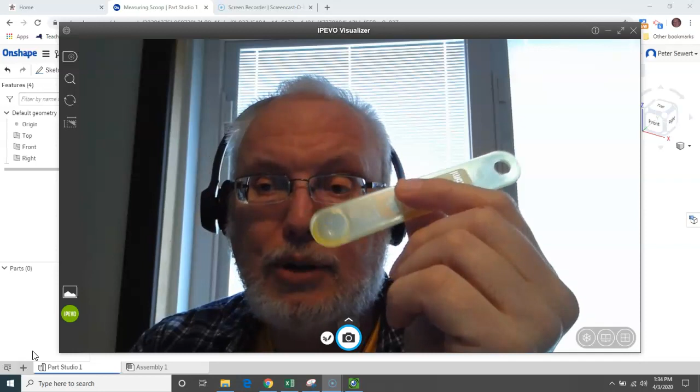I've been looking through drawers in my house trying to find stuff to draw, and I found one of these, a simple measuring spoon. We're going to figure out how to draw this measuring spoon using Onshape. As a matter of fact, I'll show you one I did before. This one is dimensionally a little different than the one we're going to do; I used another one.

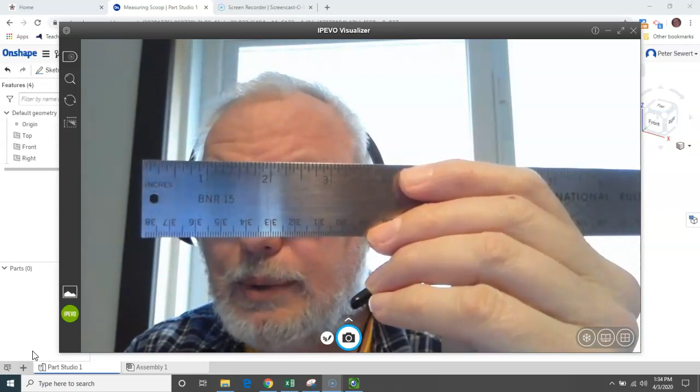This was a while ago, but you're probably thinking, geez Mr. Sewert, I don't have a way to measure stuff. You might have something at home, like a ruler - this is a nice metal one, but an older wooden one is fine too. You might have a tape measure. And if worse comes to worse, I know the distance between these two creases on my finger is about an inch.

So if I look at something, I can say to myself, that's like half an inch - I'm holding this up to my finger right now - that's like half an inch or 3/4 of an inch, something in that neighborhood, just keeping it proportional. I'm not looking for exact or perfect here, just things that are proportional, I guess is the best way to put it.

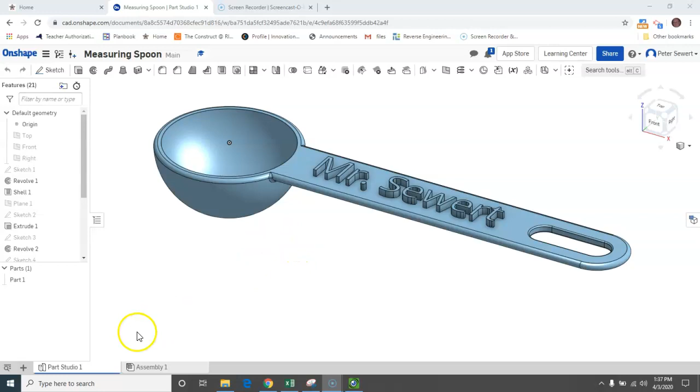When you start Onshape up, you're going to end up with something similar to this - you won't have all these things because I've been working on this - but you'll see Onshape, and then the word create. Click on create, hit document, and put in a document name. I'm going to put in measuring scoop. I'm going to click on that, and it brings up this familiar work planes thing.

That's a little different looking, but familiar in the same vein, I guess is the best way to put it. So we have front, top, and right planes.

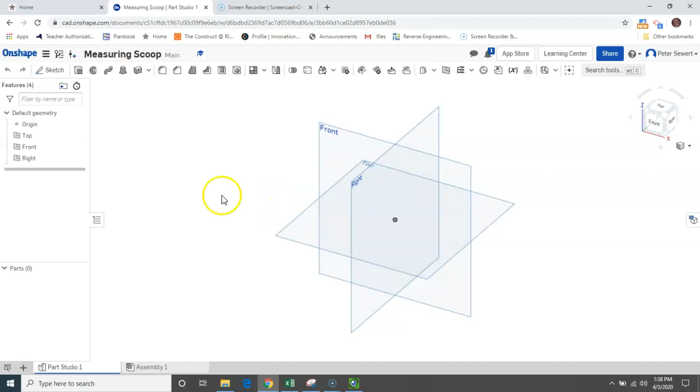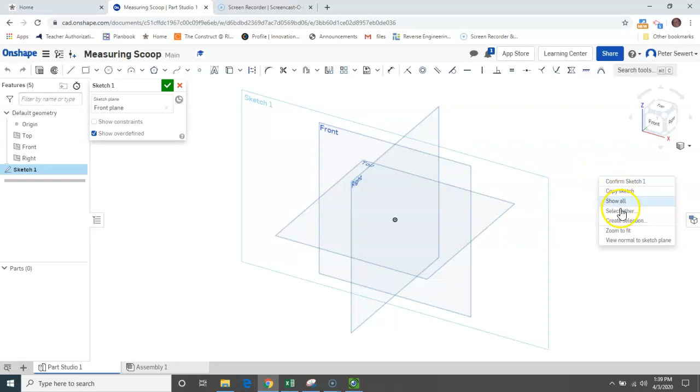I'm going to click on that front plane, and then just like in Inventor or SolidWorks, we can hit the word sketch. Now you can see it put sketch 1 on this plane, but one of the things unlike Inventor is it doesn't just show us that sketch plane. So you can go up to the view cube and click on front, or right click and select view normal to sketch plane at the bottom. Then I use my mouse wheel to scroll in.

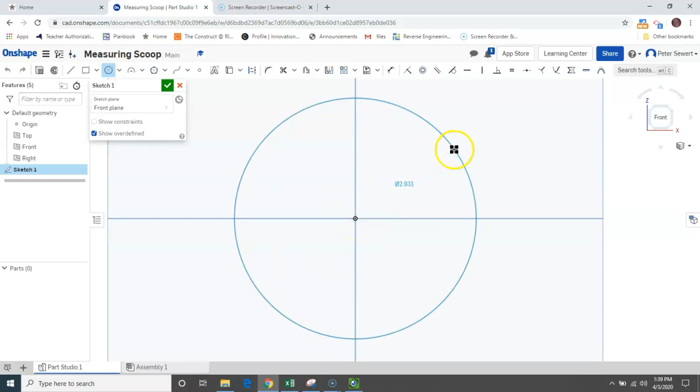Now we're going to start actually drawing some features onto this sketch plane. I'm going to start with a circle, come here to the origin - you'll notice it lights up orange - pull this out and click, then type in a diameter of 1.25, and press enter. You can zoom in more if you like.

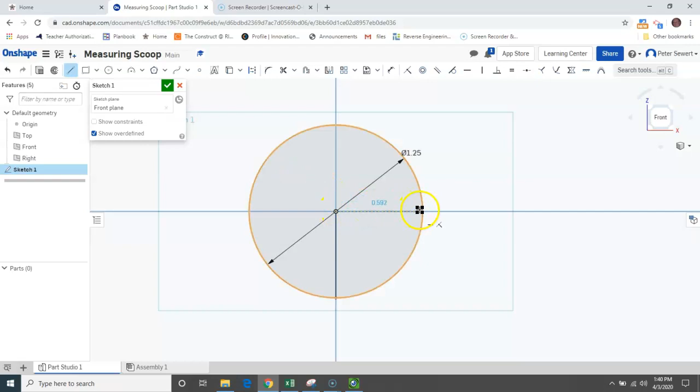Now, next thing is I'm going to start my line command up, and I'm going to go to my origin again. I'm going to pull this down straight until I get to about the 6 o'clock position on this circle, and you'll notice it highlights in orange, meaning I'm on it. So I'm going to hit escape one time. Now I'm going to restart my line command, go back to the origin, and this time pull it over till I get to about the 3 o'clock position, then hit escape.

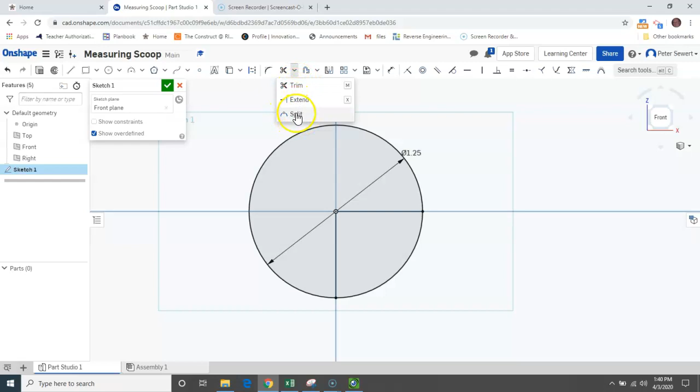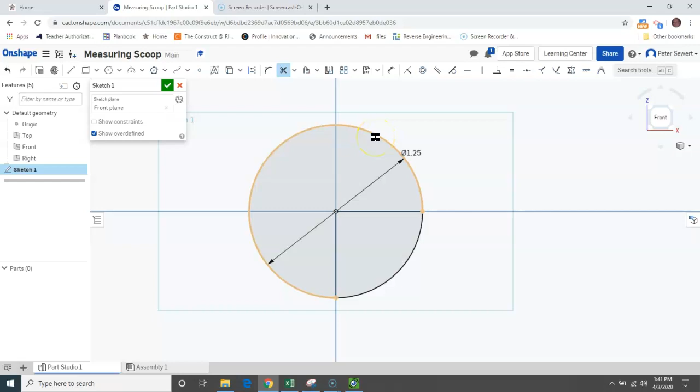And I will use these scissors. They're right up here, kind of in the middle of your screen, and they look like a pair of scissors. That is trim. By the way, if you hit these down arrows, you'll see other commands like extend and split, which I haven't messed with yet. Over here we've got our patterning tools, things of that nature, so you hit those little down arrows. This is like project geometry in Inventor. And then they have intersection here, which I've never used. So anyways, trim tool - I'm going to hit trim, come right here to this piece that I want to erase or delete away, click on it, and it goes away. And I am now done with that particular sketch.

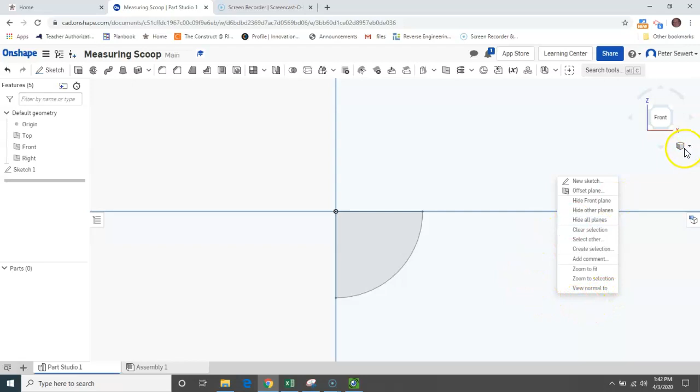Now I can check mark this, green check mark, and you'll notice it didn't go right to an isometric view - it stayed right in this straight front-on view. You can click on the corners of the view cube if you prefer. You can also select right here and click on isometric, dimetric, or trimetric - there's minor differences between these three. Or you can right click, although maybe right click isn't there. Well, okay, we'll just use this little cube thing here, and I'll say isometric.

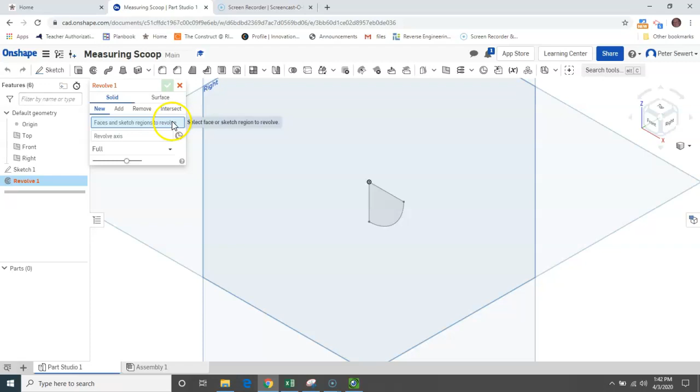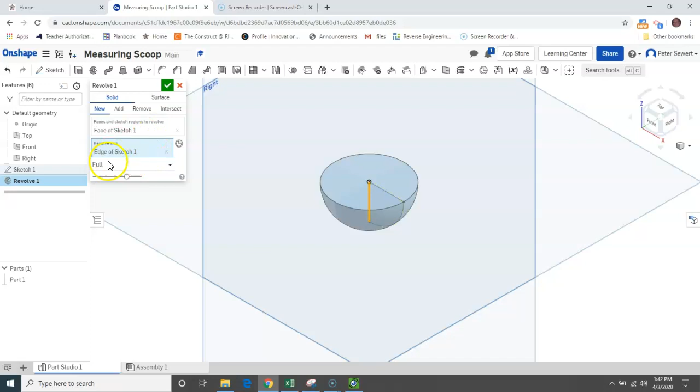Now what I'm going to do is use the Revolve tool. This is the Revolve tool, and I'm going to click on this - it's new - and I'm going to select face and sketch region to revolve. So I'll click on that. Now this lights up in pink, which means it's required but not chosen yet. So I'm going to click where it says revolve axis, and the revolve axis is going to be that line that went from the origin down to 6 o'clock. And let's see, full is the complete direction, and there we go.

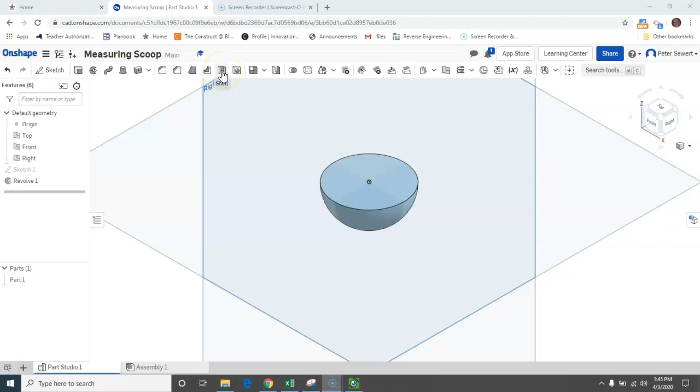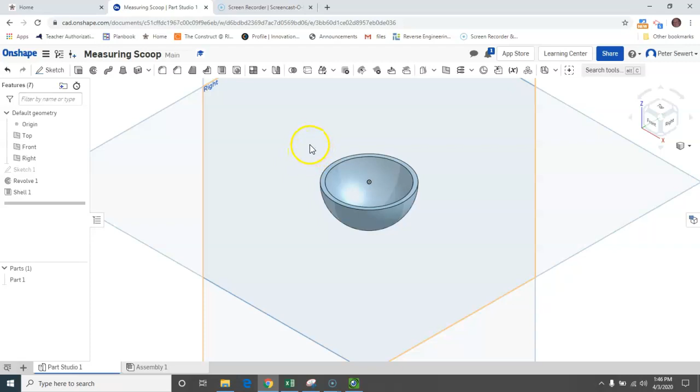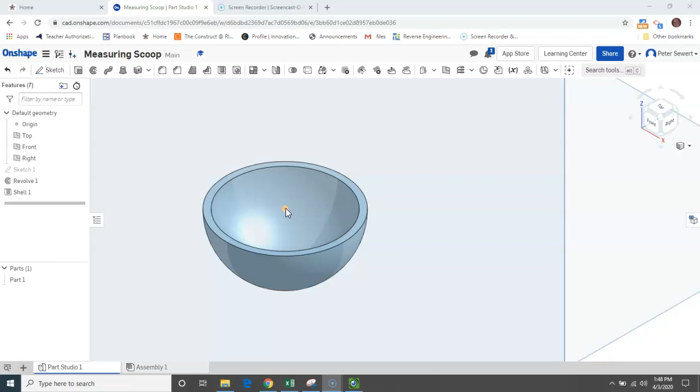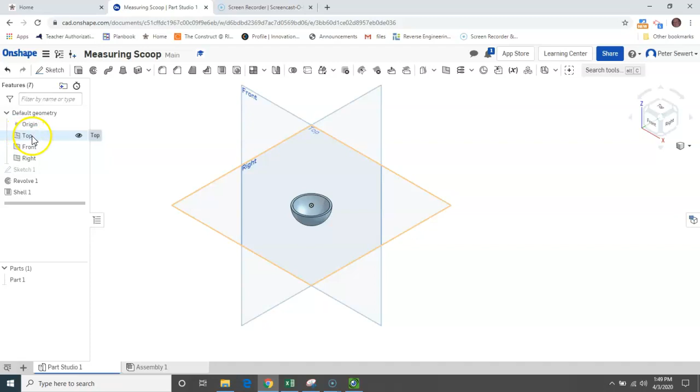Okay, so coming from the middle of this spoon, which is right here where the origin is, or this cup anyways, I need to put a handle onto the scoop. I know by measuring that that handle from the middle of this scoop to the end of it is about 3.5 inches. So I'm going to zoom out here a little bit and show you this - this is all of our work planes turned on, and I'll show you how to turn these off because it gets a little confusing. If I put my cursor right on top of the word top here, you'll see a little eye, and if I click on that, it actually turns it off. I'm going to do that with those two planes, and I'm going to leave the right hand plane turned on because we're going to use that.

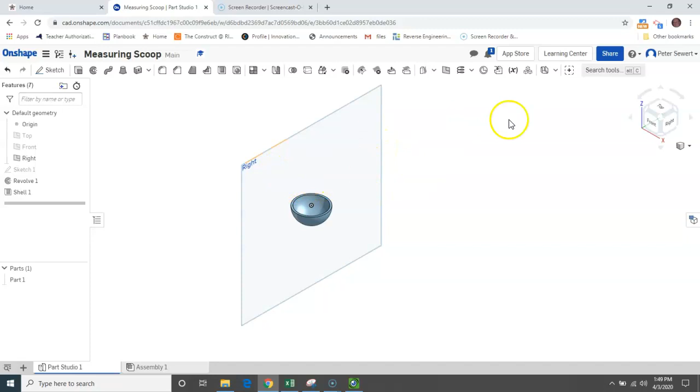Now what I'm going to do is offset a work plane from the center of the scoop, which is what this right plane is right now. I'm going to offset that work plane out 3.5 inches. So I'm going to select the work plane here, and the first thing it wants is entities, and it's asking for the plane here. Then offset distance is going to be 3.5.

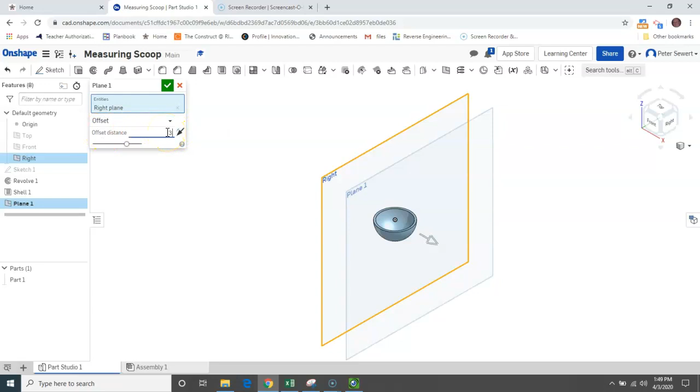And then I'm going to click select. Now after I do that, this plane will jump out. I'm going to hit sketch, and click on that plane right there. I'm going to right click and say normal to, and then click the green check mark.

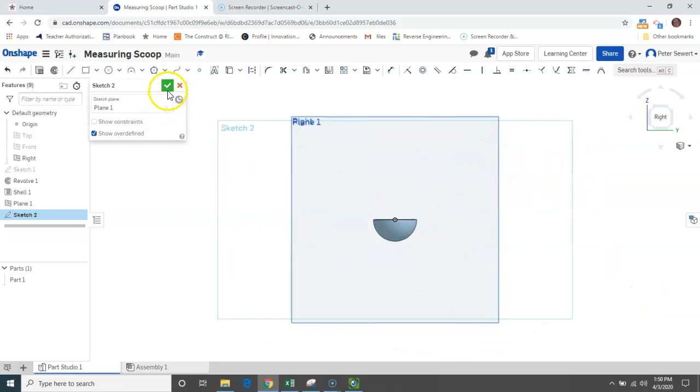Okay, now I have my second sketch on that work plane that's 3.5 inches from the center of the scoop. I'm going to zoom in here so that you can see this, and I recommend you zoom in too.

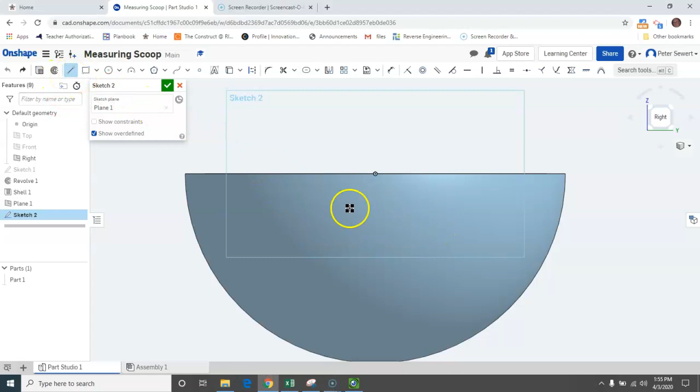What I'm going to do is draw a line. I'll come down about a third of the way down this thing, and draw a line that goes from the left-hand side of the origin to the right-hand side. I want the total length of this line to be half an inch, but equally on the left side of the origin and on the right-hand side.

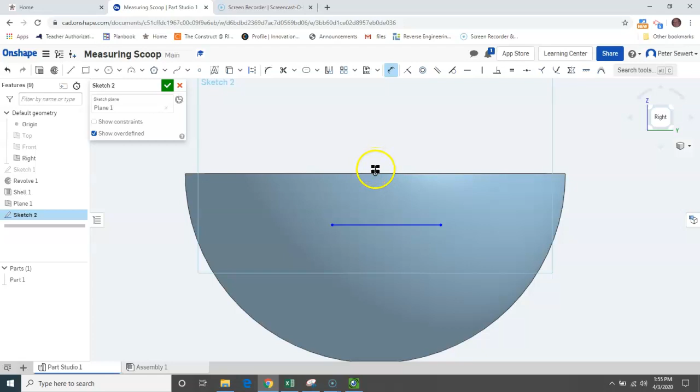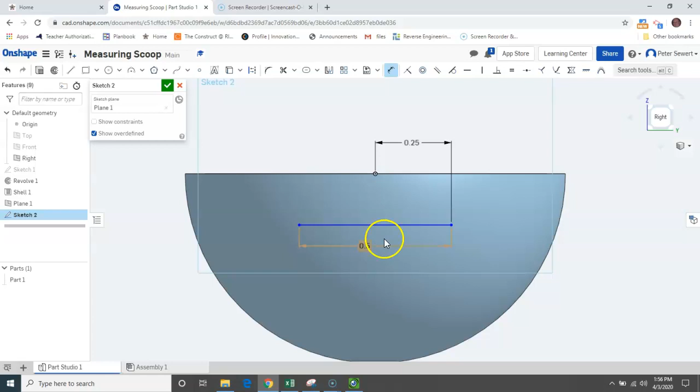So I'm going to use a dimension here, and this is the dimension tool right here. I'll click on this, come out here, click on the end of the line and on the origin, and put in a distance of 0.25, which is a quarter of an inch, and hit enter. Now I'm going to click on the entire line and click again down below it, and put in a distance of 0.5. So that gives me my line.

Now the reason I did that, and I'll hit escape once just to get out of the tool here, is because you're going to use a tool called Slot. The Slot tool is below this one, an arrow on the arrow here. This tool right here is the offset tool, but Slot is a sub menu of that, and I'm going to click on Slot.

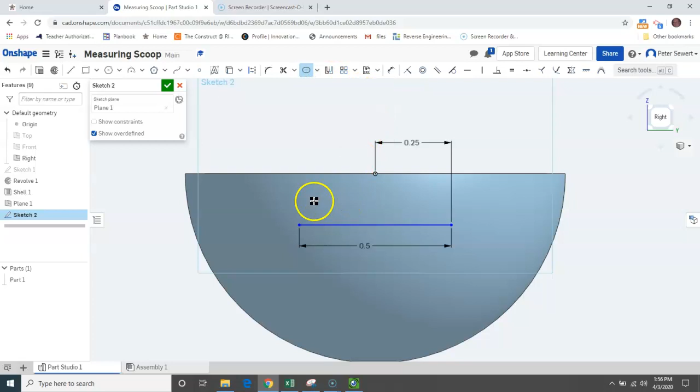Just like in any of the other software, if you put your cursor here and leave it long enough, it gives you instructions on how to use a particular tool. It does this with all of them. But the idea here is once you click on this, you can just select the line, and I'm going to zoom out now so we can see our dimension.

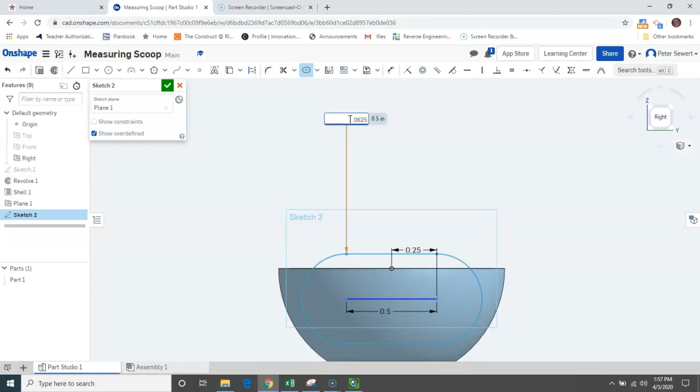I don't know why it does this, but I'm going to double click on that dimension, and you'll notice that it's using the centers of the arc as the endpoints of this line. Anyways, I'm going to put in a distance of 0.0625, that's going to be the diameter of this slot, and hit enter. For some reason it just took a couple seconds. All right, so good deal.

So that's the slot that is actually going to form our handle. Now what I'm going to do is use the dimension tool again, going from this line in the middle to the top of my part, and put in a distance that is half of that 0.0625 thickness. Now you might not remember that that is 0.03125.

You don't even have to. What you can do is put in 0.0625 divided by 2, and that's going to give you the same result, which is 0.03125 on this thing.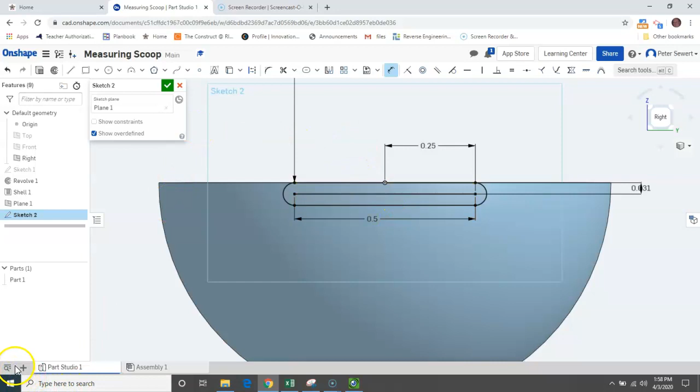Okay, so we're done with actually sketching things here. I'm going to hit my green check mark, right click—well, I keep forgetting right click doesn't work here. So I'll just click on this little down arrow and hit the word isometric, and zoom in. Now you can see my sketch way out here in space away from everything, at 3.5 inches, and I'm going to want to extrude this.

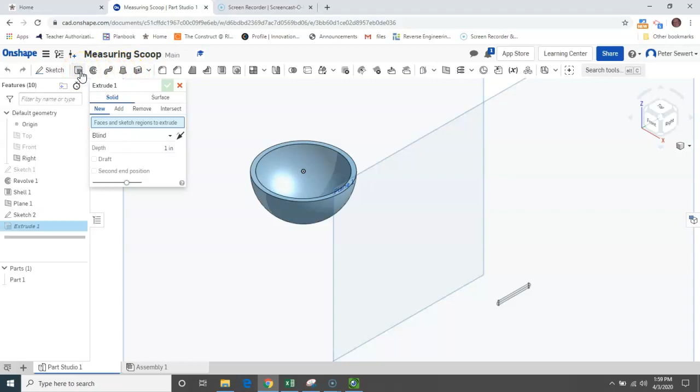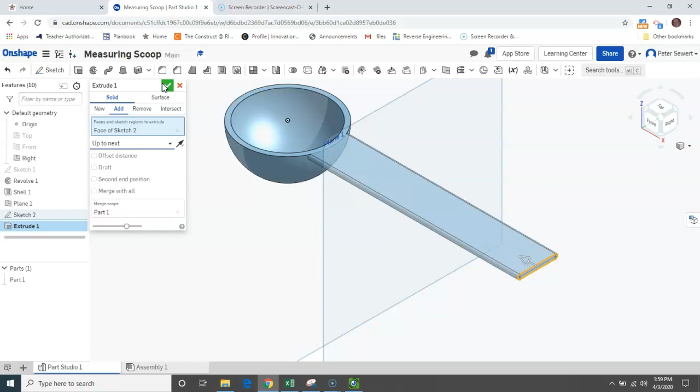Extrude is this command right here, and it says faces and sketch regions to extrude. So I'm going to click on that slot, and it is going in the wrong direction, so I'll hit this little arrow right here. Then instead of being blind, the end type is going to say up to next. That gives me this handle of our spoon extending to the scoop part, and I hit the green check mark.

Okay, now I'm going to start a sketch. I'm going to put it on this sketch plane right here. I can just select right to take a look at this, and I'll zoom in a bit. And I'm going to do what's called use.

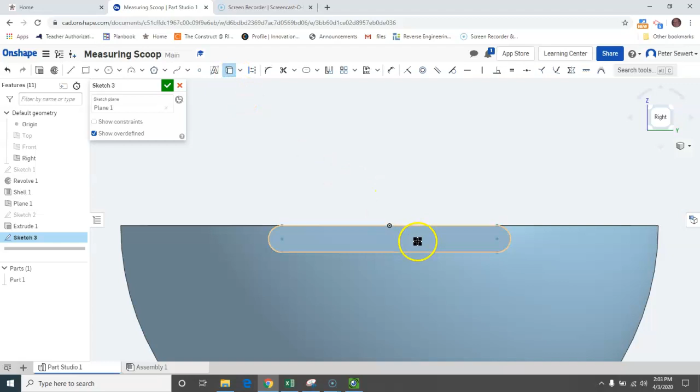This is it right here. This is sort of like project geometry is. I'm just going to put it in the middle of the handle and click on that. Now I'm going to use the line tool, and come right from the origin here. I'm going to go to this endpoint.

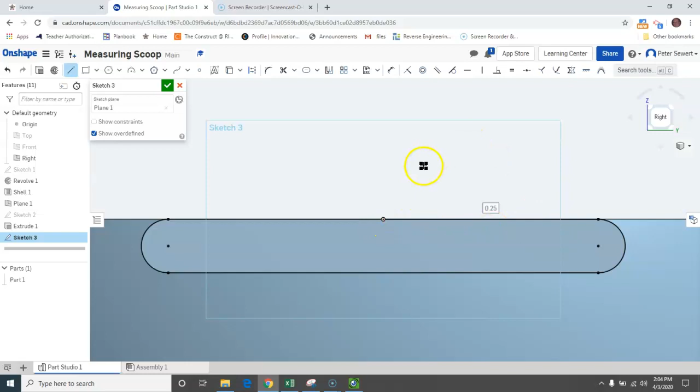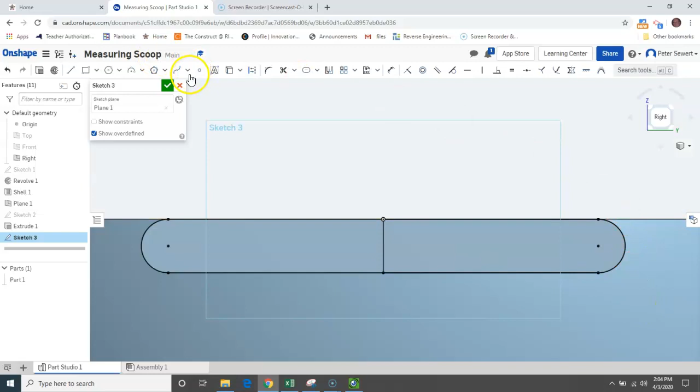But actually, I forgot to draw one line. I can draw another line from the origin down to here. Now I can go back to my line command and come to this one, and then use the arc tool, which is 3-point arc right here. I'm going to select the start of the arc, the end of the arc, and someplace on the middle of it, then hit the green check mark.

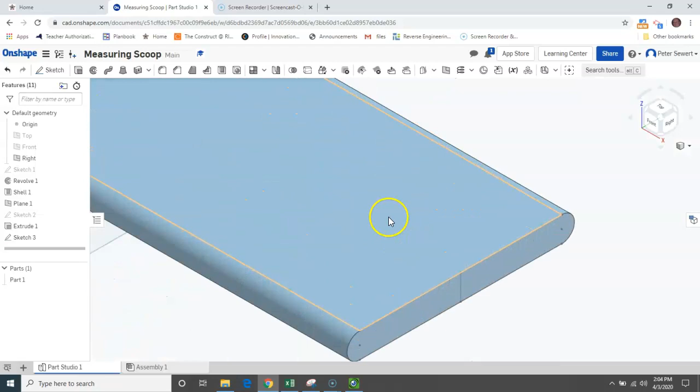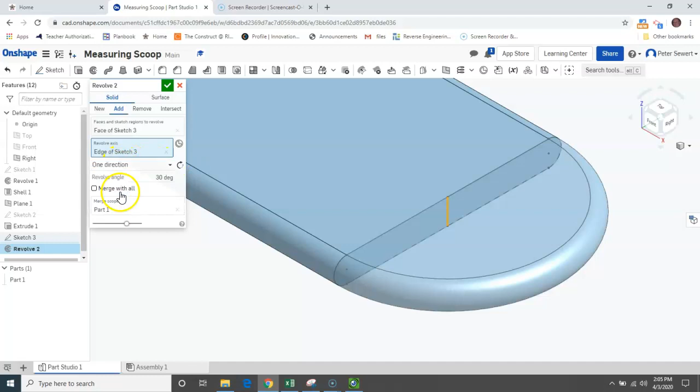I'll look at this isometrically now and zoom in so we can see it. I'm going to use the Revolve tool, select right in that area where I just drew all that stuff, and hit Revolve Axis, which is going to be this - you can see it goes around. Instead of going full, I'm going to tell it to go one direction, and change this to 180 degrees. For some reason it doesn't update unless I hit enter. I hit enter and it did. Then I hit the check mark, and there we go - we have our scoop with a nice rounded end on it.

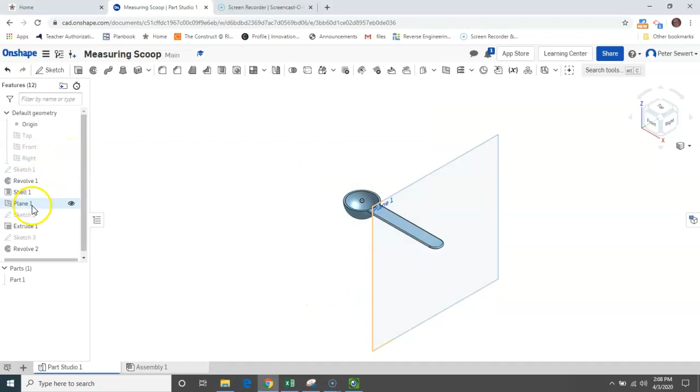Okay, so now I'm going to turn off these planes. I'll turn off the right plane first, just put my cursor on there and hit the little eye. Then this guy is plane number 1, so I'll click on that and get rid of it too. I'll zoom in here a little bit.

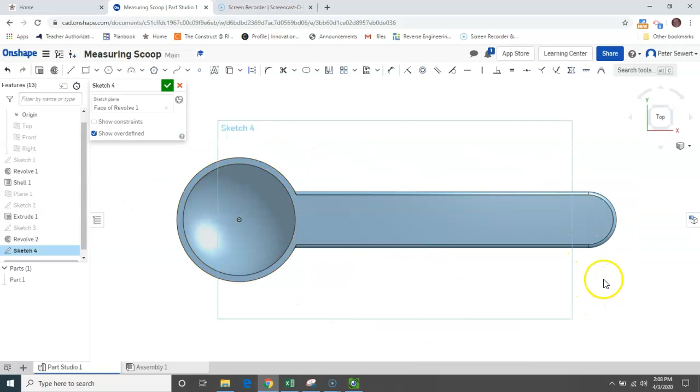Next thing we're going to do is there's a slot down here in the handle. So we are going to start a sketch. I'm going to put it right on that surface, right click and say view normal to, and there we go.

We're going to put a slot into this spoon now down here at this end. I just started the line tool, and I'm going to go to the middle of this, searching along here - maybe I should zoom in. You don't really see it any better when I zoom in, but what I'm looking for is the center point of this arc, and I know it's right about there. Maybe you can see this - I get a little square box. That means center, so I'm going to click on that.

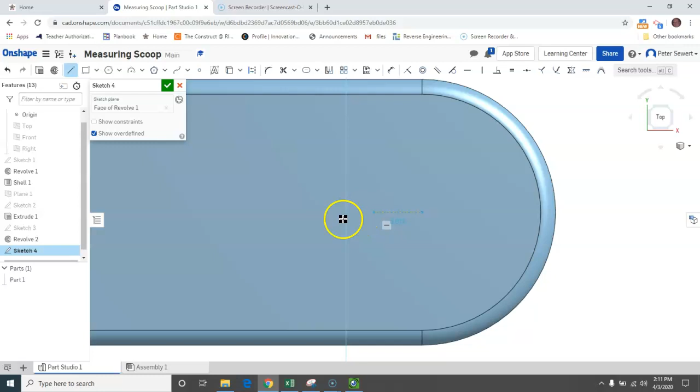I'm going to pull this line to the left and select, and change the - oopsie, I'm going to undo just one step there. I can do a dimension here is what I want to do now. I'm going to click, and put in a dimension of 1/2 inch.

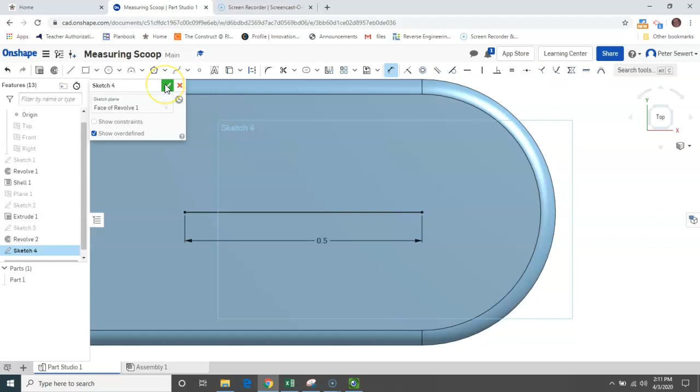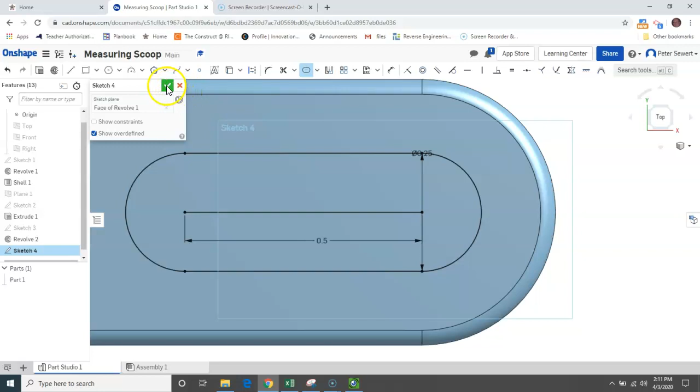Okay, so next thing up is slot tool, and I'm going to pick on this, and it's going to give me that default value that I just put in a few minutes ago when I did the extrusion of the handle. But I want to make this about 1/4 inch, so it's about 1/4 inch, and I click, and I am done with this sketch now.

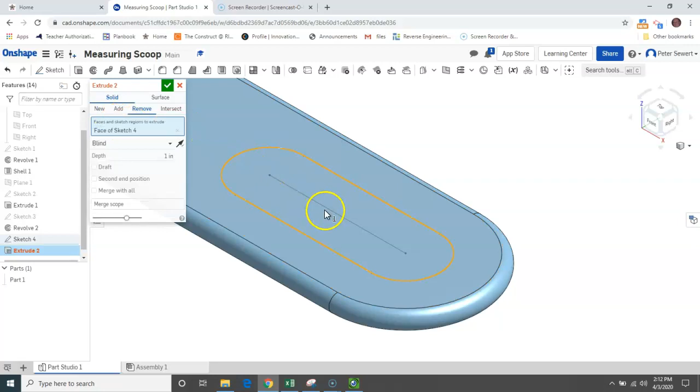Now I'm going to go and hit isometric, and I'll zoom in so I can see this a little bit better. What I want to do is an extrude, but this is going to be a remove. Then I select faces and sketches to remove, which is that one. Instead of saying blind for depth, I'm going to say through all, and green check mark.

Now there's a couple cosmetic things we have to do. One of them is we need to put some fillets on. So I'm going to click on the fillet tool, which is right here. You can see it looks like a fillet. And then entities to fillet is going to be this top surface right here of the arc.

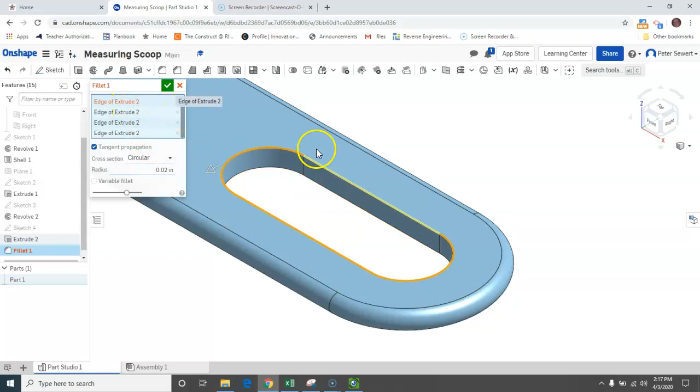This 0.2 is definitely going to be too big of a fillet, so I'm going to put in 0.02, and I'll hit check mark. Oh, something's up with one of these. Didn't like one of them, that's why it's red. Oh, I just clicked on it and it changed it. I'm going to say OK.

Then I'll go to the lower corner here. And by the way, you can right click on your mouse, and that allows you to orbit things, so I can kind of twist them around, based on where the center of the mouse wheel is.

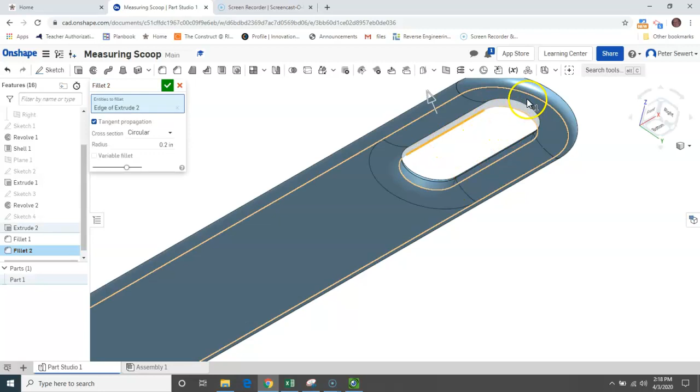Anyways, back to fillet. I'm going to use that, do the same thing here on the bottom. 0.02, there we go. 0.02, 0.02. I'll hit the check mark. And now I've got a fillet there.

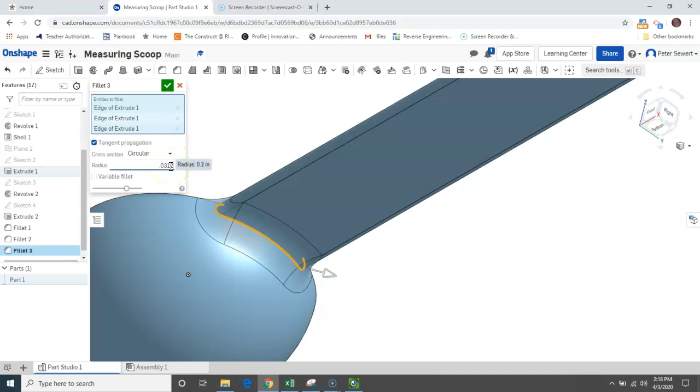Since I'm on the bottom of this, I'm going to zoom out and go down to this end right here. I'll start my fillet tool again. Entities to fillet is going to be this guy right here, probably that one, and that guy right there. I'm going to put in a 0.03125 fillet for these three, and I'll hit OK.

Then I'll go back to my regular old isometric and zoom in, and I'll do the fillet again on this edge, and my fillet distance is going to be 0.03125. I'll green check mark that. Didn't work. Why didn't you work? Edge to revolve right there. Am I hitting the wrong tool?

There we go. Fillet. Entities to fillet. That one. 0.03125. Enter. Green check mark. I wonder why that's not working.

Let me check something. Okay, I found out why my fillet on this edge right here won't work, and it's simply this one that I just put in on the underside. So that's fillet number 3. I'm going to right click on that right now, and I'm actually going to delete it and get rid of it.

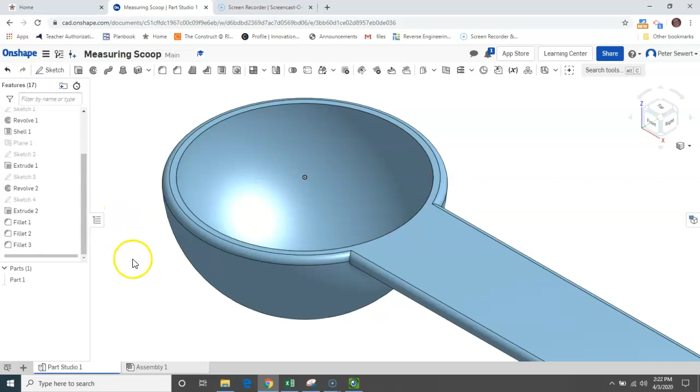Now I'll go back to my fillet tool and click on this edge, and I'm going to change my radius to 0.03125. I'll hit enter, and it worked that time, and I'll check mark. Now I'll go back to the underside of this thing, and I'll zoom in so we can see it. I will again try doing the fillet, this edge and that edge and the one over on the other side of this thing.

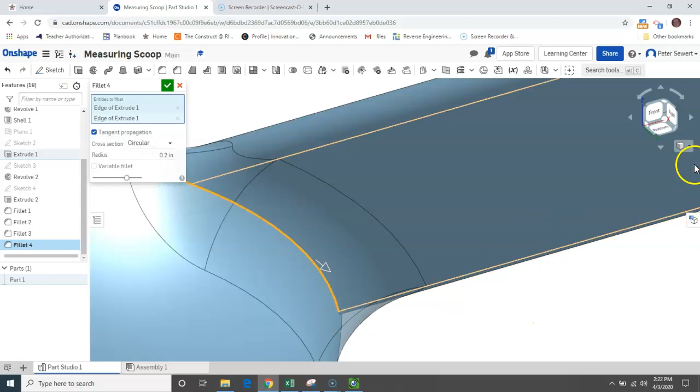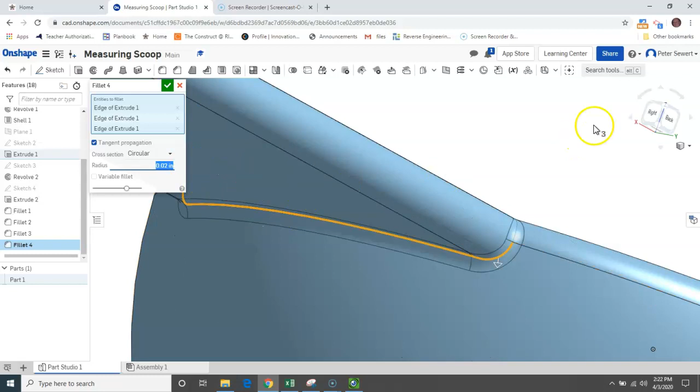Zoom out here. I'll orbit it around. There we go. And I'll do that one, and I'm going to put in 0.02. Let's see if that works. Enter, and it looks like it did, happily. So that was simply an order thing.

I had to get this set correctly—I had to do the fillets in the right order, and that's what happens sometimes. Something should work, but it won't, so just change the order that you're working on it, and suddenly it does.

Okay, last thing, we're going to emboss our name on here. I'm going to put Mr. Sewert on here; you're going to put your name on here. All right, last thing to do is to add your name to the handle. So start a sketch. I'm going to click on the handle, right click, and say View Normal To.

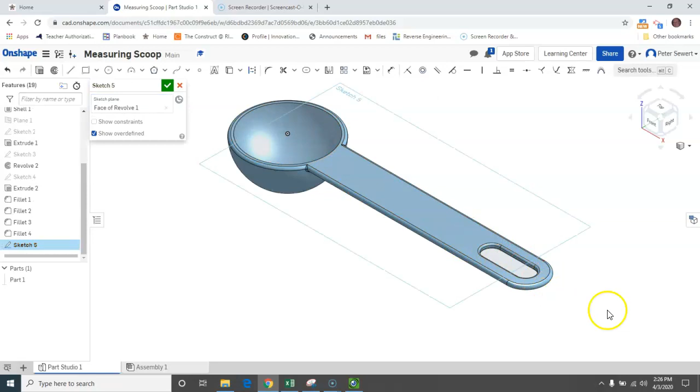Then I'm going to go to the text tool here, and click on that. I'm going to click and hold and pull this from the upper left corner to lower right, and instead of leaving default text there, I'm going to put in my name, Mr. Sewert. I'll hit the green check mark, and the text shows up.

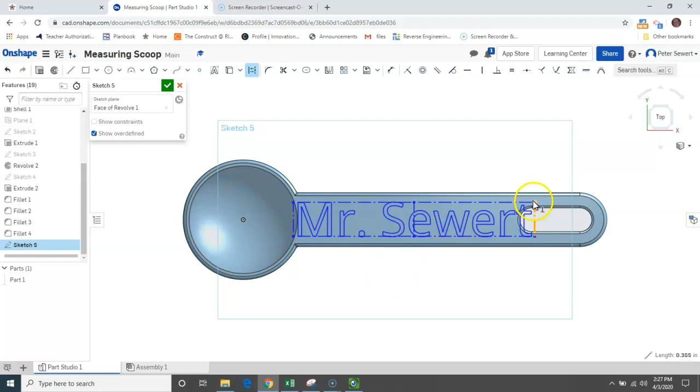Now you can see that this is a little too big, so I'm just going to click on the handle here. I'll move this—probably not helpful. Let's see. I know I can move this thing in. Let's reposition this here, and I'll click on the line or the edge up here.

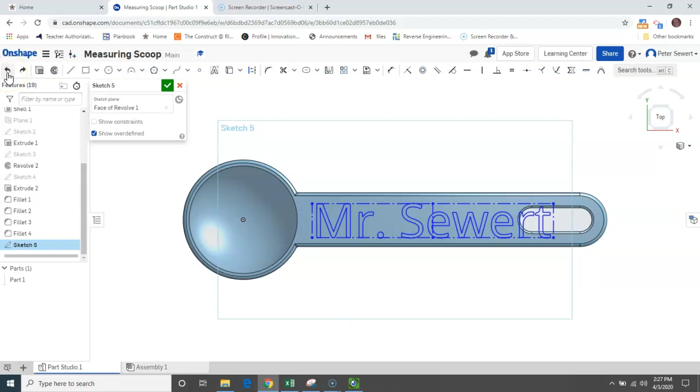Well, you know what? I'll just redo it all together. So I'll undo a couple steps here. There we go. All right, back to text.

This time I'll keep it a little smaller and a little shorter. There we go. And I'll put in Mr. Sewert again. Hit the green check mark, and now my text is there. Okay, now I'll green check mark this.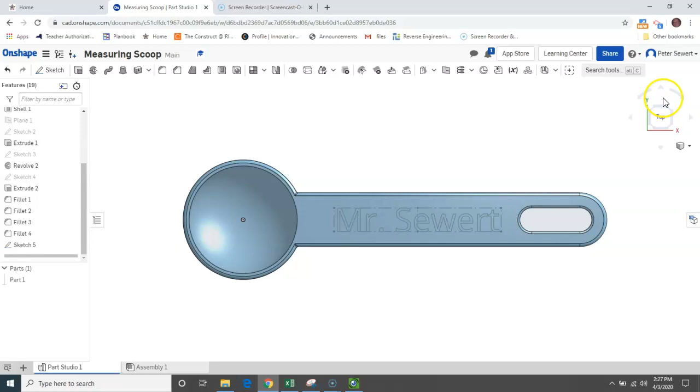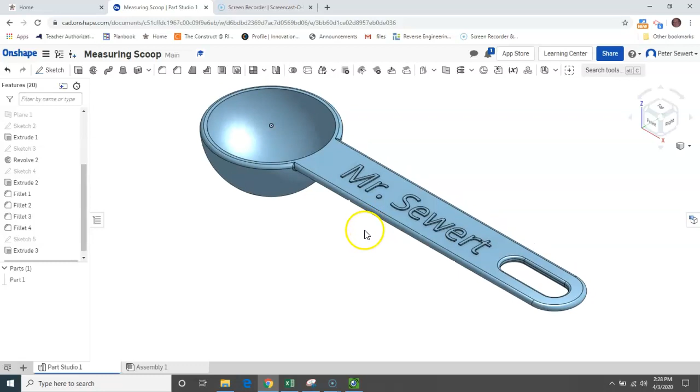I'll right click and look at this isometrically. Then I'll do an extrude of the text. So I selected that, I'm going to bring it up 0.01 inches, hit enter, and then green check mark, and there is my scoop. So that is the complete thing. Remember, you have to put your name on it at the end here, and have some fun.